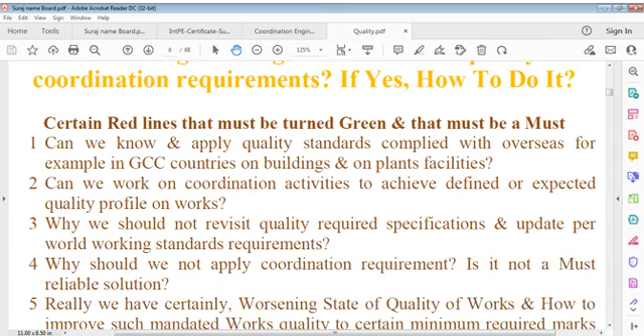We have to wait and cross these stops. And it's not difficult. First, we have to check our own red lines of mind, our own red lines of not doing something at will, or leaving it to others, or not thinking of something, and that drags us to somewhere not acceptable. These red lines must go, and this cannot go just by speaking, it has to go by doing something.

That is where we have to be very work oriented as a person. Work doesn't mean only work, and we have to think in some way of what we say is coordination engineering. I name it that way just for this talk. You can say this talk itself is a talk of coordination engineering, communication engineering, thinking engineering, and research. Research based on what I did. I try to analyze my experience in the past, and I try to compare it with what's happening today and what we think it can take shape of in future, and that's a very important point.

Because we all deal with projects every time in life, and many deal with operations which are continuous systems, but projects are not continuous always. Projects can change. Projects start and end. And that is enough period, we can say, for a person to learn, because there is a start and there is an end, and we can learn a lot from that.

We may say that it's a quality note, something we have to understand clearly. It's not just a note. It gives us general information and specific information that we cannot get otherwise. Now I'm talking of engineers and engineering works. We say, for reliable quality engineering works and deliveries...

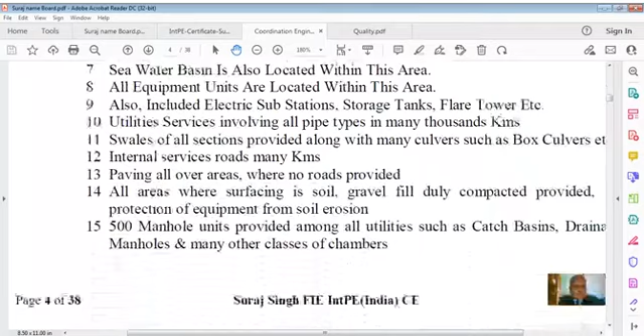This is here a seawater reservoir, you can say, reservoir seawater basin for purpose of storing water at industrial plant, circulating this water for cooling purpose. And then it is also, you can say, this is a record building in Qatar for purpose of digital recording of a plant.

And here is a hospital building in Jeddah, Saudi Arabia. And this is a plant at Ras Laffan, Qatar. And that's as you can see.

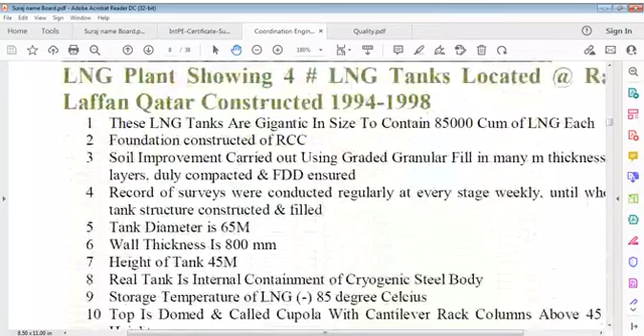I think that covers all this. Now we are on the page where we start coordination engineering, which is a must, you can say, on every project, without which we cannot even think of doing a project. As I already said, coordination is a very different word, and we cannot just commonize this. We have to understand this word in its concept itself, not simply what we think it should be. So here is a point, coordination engineering. Just a minute please, let me put this off here.

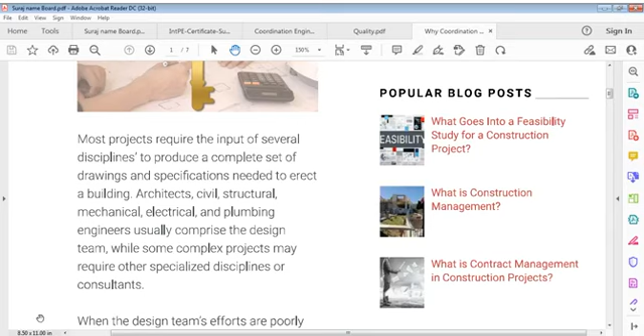Most projects require input of several disciplines to produce a complete set of drawings and specifications needed to erect a building. Architects, civil, structural, mechanical, electrical, and plumbing engineers usually comprise the design team, while some complex projects may require other specialized disciplines or consultants.

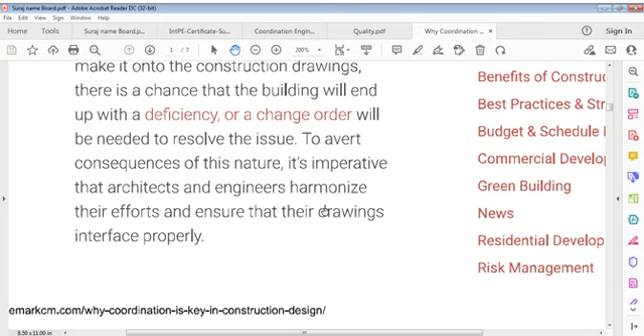When design teams' efforts are poorly coordinated, drawings of one discipline may not align with that of another. If such errors make it onto construction drawings, there is a chance the building ends up with a deficiency or a change order necessary to resolve the issue. To avoid consequences of this nature, it is imperative that architects and engineers harmonize efforts and ensure that drawings interface properly. Also, applicable codes are important in this case.

The design process starts after consultation with the client, during which the project's budget, expected finish date, visual appearance, spatial requirements, functional program, and other design objectives are established. Having established the client's expectations, the architect gets to work on drawings and specifications. At a minimum, a full set of architectural drawings should comprise floor plans, roof plans, elevations, sections, and perspective drawings.

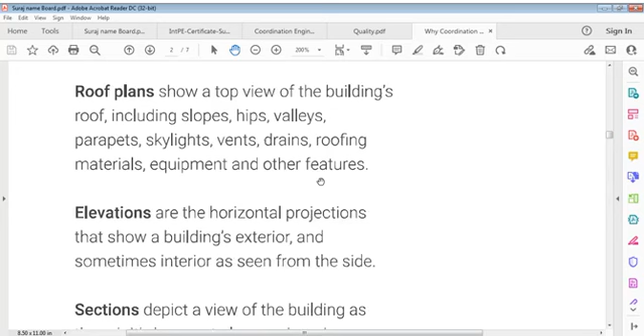Floor plans are vertical orthographic projections which show a building's layout and other physical attributes for each floor. These drawings depict interior walls, doors, windows, appliances, equipment, or use of all spaces. Roof plans show the top view of a building's roof, including slopes, hips, valleys, parapets, skylights, vents, drains, roofing material, equipment, and other features. Elevations are horizontal projections that show a building's exterior and sometimes interior as seen from the side.

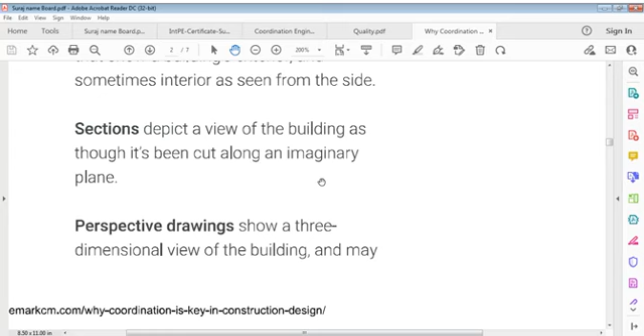Sections depict a view of the building as though it's been cut along an imaginary plane. A perspective view shows a three-dimensional view of the building, and other disciplines work basing their work on preliminary architectural drawings.

Structural engineers design structures to support buildings' live and environmental loads, thus enabling them to remain upright. Generally, a building's structure consists of vertical and horizontal elements such as columns and slabs and connections between them. Among them, the structural engineer's job is to tailor these features to fit in with the architectural designs.

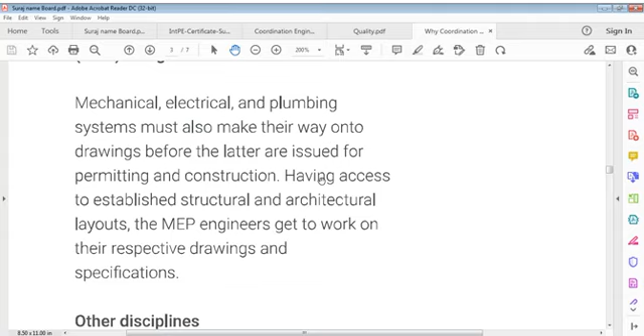Mechanical, electrical, and plumbing, MEP designs, must also make their way onto drawings before the latter are issued for permitting and construction. Having access to the established structural and architectural layouts, MEP engineers get to work on the respective drawings and specifications.

Other disciplines contributing to the overall drawing package may include landscape, civil engineers, communications engineers, acoustics and seismic consultants, and others whose involvement may be required. A clash arises when drawings don't align well with one another. Common examples of clashing include columns obstructing views or passes, misaligned slab edges, mechanical ducts running through structural members, and other instances where a disagreement between disciplines creates an unbuildable scenario.

How to improve coordination? That's the point here. Ensure effective integration between disciplines. The right expectations must be laid out before the project begins. Architects and engineers must agree on a set of deliverables that facilitate their team's coordination efforts. This may vary from project to project.

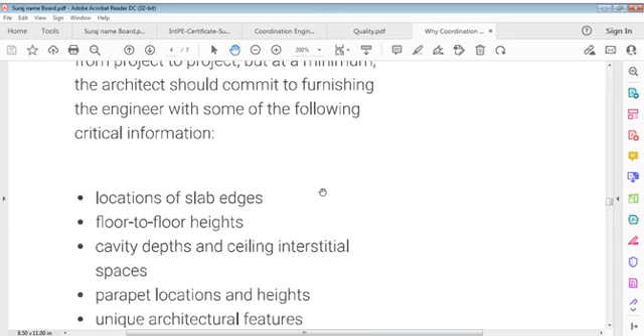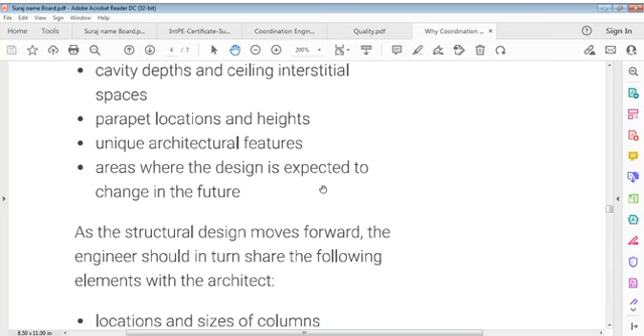At a minimum, architects should commit to furnishing engineers with the following critical information: location of slab edges, floor-to-floor heights, cavity depths and ceiling interstitial spaces, parapet locations and heights, unique architectural features, and areas where design is expected to change in the future. As structural design moves forward, engineers should in turn share the following elements with the architect: location and sizes of columns, and opportunities for improving efficiency of the structure through changes to architectural design.

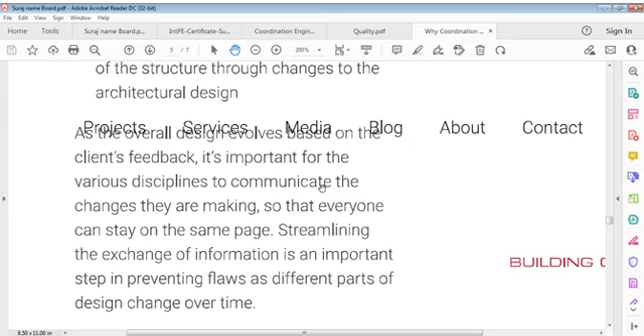As the overall design evolves based on client feedback, it's important for various disciplines to communicate the changes they are making so that everyone can stay on the same page. Streamlining the exchange of information is an important step in preventing flaws as different parts of the design change over time.

Today, modern technology offers a great way to improve efficiency of interdisciplinary coordination. Processes such as building information modeling, usually called BIM, integrate various design inputs, facilitating improved accuracy of clash detection. Peer reviews are also helpful in identifying systemization flaws and getting them fixed. With the aid of BIM and construction organization practices such as peer reviews, project teams should be well equipped to enhance coordination between design disciplines, as well as for complex projects. It always pays to hire a professional construction leader to oversee a project's planning phase.

So this is just, we may say, what is construction management? Professional construction project management is a super fine-tuned system designed to facilitate planning, coordination, and control of a project from early stages all the way through to close out and completion.

All right, that's okay, fine. So we have to close this now and go to something else, and we have to see how it works. Let's go to someone else — I think we got something only from this, not that much. Let's see what research.net says. This is also the latest one, I think. I visited this page already, so I don't know why coordination is concerned.

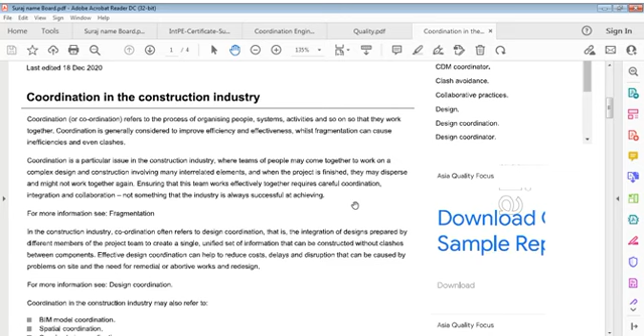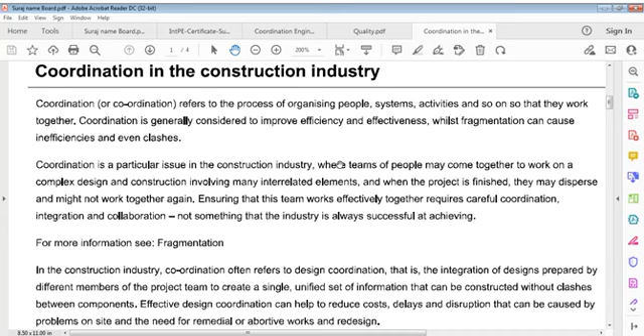Coordination in construction industry. It says coordination in construction industries. We have to be serious about this issue, only then we can understand. So coordination, or coordination, refers to the process of organizing people, systems, activities, and so on and so forth, so they work together. Coordination is generally considered to improve efficiency and effectiveness, whilst fragmentation can cause inefficiencies and even clashes.

Coordination is a particular issue in construction industry, where teams of people may come together to work on a complex design and construction involving many interrelated elements. When the project is finished, they may disappear or disperse and might not work together again. Ensuring that this team works effectively together requires careful coordination, integration and collaboration. So what it says is it requires coordination, integration and collaboration. Not something that industry is always successful at achieving.

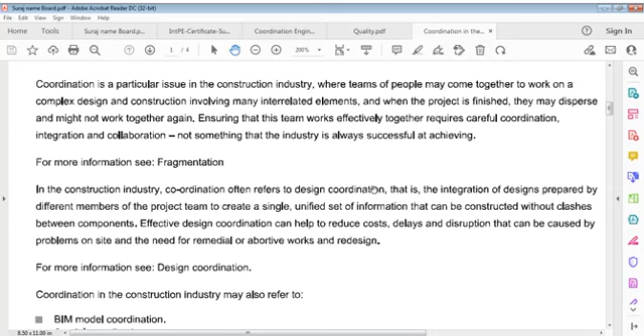This means there exists a void, a big void. Let us see, in construction industry coordination often refers to design coordination, that is, integration of designs prepared by different members of the project team to create a single unified set of information that can be constructed without clashes between components. Effective design coordination can help to reduce costs.

That's what I always stress on, designs. Again I read: in construction industry, coordination often refers to design coordination, which is integration of designs prepared by different members of the project team to create a single unified set of information that can be constructed without clashes between components. Effective design coordination can help to reduce costs, delays, and disruption that can be caused by problems on site and the requirement for remedial or abortive works and redesign.

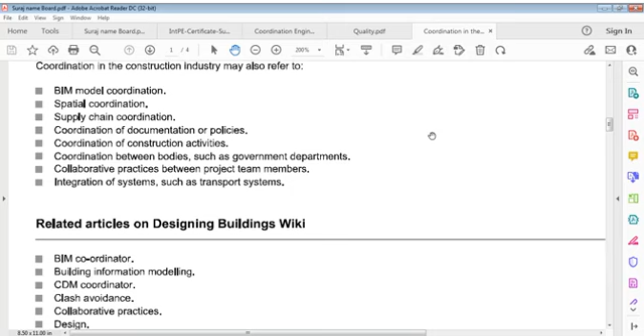Now, coordination in construction industry may also refer to BIM model coordination, spatial coordination, supply chain coordination, coordination of documentation or policies, coordination of construction activities, coordination between bodies such as government departments, collaborative practices between project team members, integration of systems such as transport. There may be many articles on this: BIM coordinator, information modeling, CDM coordinator, clash avoidance, collaborative practices, design coordination, design coordinator, design management, fragmentation, information manager, integrated design, lead designer, retrofit coordinator, tolerances, and likewise, if we go further, there's nothing on page 2.

Why? There's nothing on page 2. What's that? I'm not going to move further on this. What's the reason? Something wrong, I think, here. Let me see what's wrong. Well, I think there's no information. This was end of that.

No problem, this was end of that. So there are projects shown on this, no problem, this is enough information we got from this. I'd like to close this page and find something else if I got anything. So if you go back to that website, it says here, let's see, I'm trying to find more information, that is BIM model coordinator, articles on coordination, BIM model, and it says BIM model is trying to say what's that.

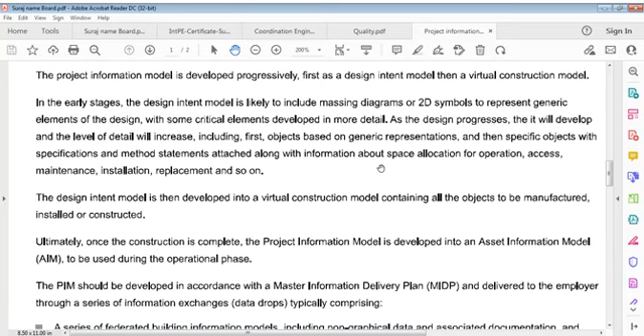As design progresses, it will develop and the level of detail will increase, including first objects based on generic representations and then specific objects with specifications and method statements attached, along with information about space allocation for operation, access, maintenance, installation, replacement, and so on. The design intent model is then developed into a virtual construction model containing all objects to be manufactured, installed, or constructed. Ultimately, once construction is complete, the project information model is developed into an asset information model, AIM, to be used during operational phases.

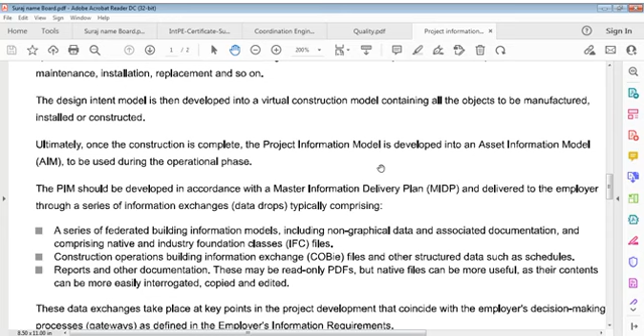The project information model should be developed in accordance with the Master Information Delivery Plan, MIDP, and delivered to the employer through a series of information exchanges, or data drops, typically comprising a series of federated building information models, including non-graphical data and associated documentation, comprising native and Industry Foundation Classes (IFC) files, Construction Operations Building Information Exchange (COBie) files, and other structured data such as schedules, reports, and other documentation. These may be read-only PDFs, but native files can be more useful as their contents can be more easily interrogated, copied, and edited. This data exchange happens at key points in project development that coincide with the employer's decision-making processes, as defined in the Employer's Information Requirements.

Related articles, so what may be articles. So I'll close this, this has done its job. I'm moving on from project information, and I'll take another glimpse here. Let's go to the next topic.

You can say here there's spatial coordination, supply chain coordination, and coordination of documentation and policies. Let us understand what spatial coordination is. Spatial coordination is the process of completing the design and construction of a building, that's what they say. Let us print this out too. I'm just trying to give you as much as possible, and it benefits everybody. It's maybe one or two pages, doesn't matter, but at least we know what's included, since it's about Designing Buildings site, so it's better to know something about that.

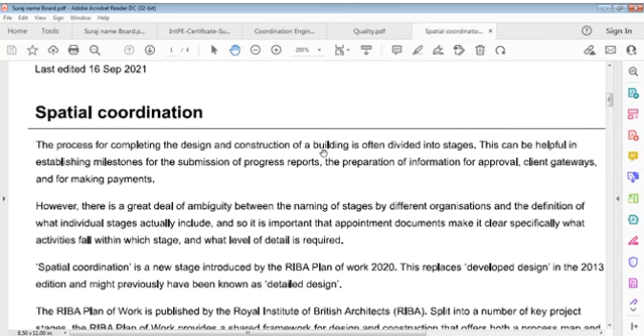What it says is this. Let's see, it says spatial coordination, and this is also a recent one, 2021. Here it says, spatial coordination is the process for completing design and construction of a building.

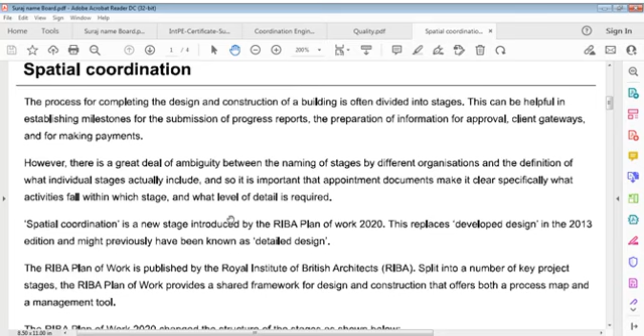The process for completing design and construction of a building is often divided into stages, which can be helpful in establishing milestones for submission of progress reports, preparation of information for approval, client's gateway, and for making payments. However, there is a great deal of ambiguity in the naming of stages by different organizations and in the definitions of what individual stages actually include. It is important that the appointment document make clear specifically what activities fall within which stage and what level of detail is required.

Spatial coordination is a new stage introduced by RIBA Plan of Work 2020. This replaces developed design from the 2013 version. So developed design is gone, and spatial coordination comes into picture.

Detailed design is now called spatial coordination. RIBA Plan of Work is published by the Royal Institute of British Architects and is split into a number of key project stages. It provides a shared framework for design and construction that offers both a process map and a management tool. Let's compare the 2013 edition with 2020.

In 2013 it was strategic definition, and in 2020 it's still strategic definition. In 2013, preparation and brief, meaning brief is now briefing. Concept design remains concept design. Developed design becomes spatial coordination — we have space, and we have to code it accordingly.

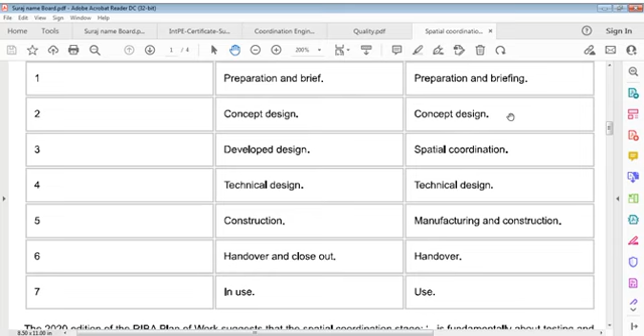Technical design remains technical design. Construction has become manufacturing and construction. Handover and closeout is now just handover, and use is still use. This is what has changed — not a big change, I think.

The 2020 edition Plan of Work suggests that the spatial coordination stage is fundamentally about testing and validating the architectural concept, to make sure that the architectural and engineering information prepared at Stage 2 is spatially coordinated before the detailed information required to manufacture and construct the building is produced at Stage 4. Stage 3 is not about adjusting the architectural concept, which should remain substantially unaltered.

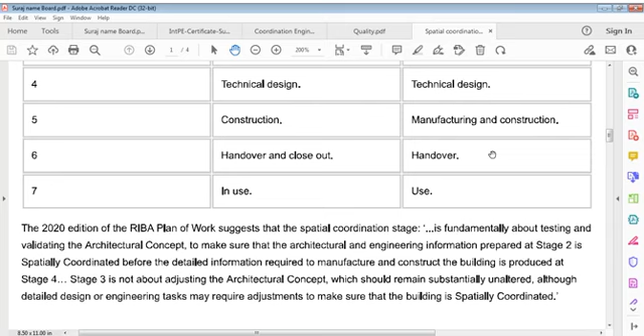Although detailed design or engineering tasks may require adjustments to make sure the building is spatially coordinated, a spatially coordinated design is one in which the client's spatial requirements and the space required for building systems—such as structural and building services engineering aspects including grids, risers, and plant rooms—have been determined and fixed, allowing Stage 4 to progress without further iteration.

I think we have to go to the next one because there are articles here. Let me go back and give as much information as possible about spatial coordination and see what it actually is. Let's check this test, it's different. Unfortunately there's no link here, so we can't say anything more about this from the RIBA Plan of Work page. I'm trying to find where it says the building is spatially coordinated—let's see what that means. It seems to be the same thing, nothing much different, so I don't want to waste more time on this.

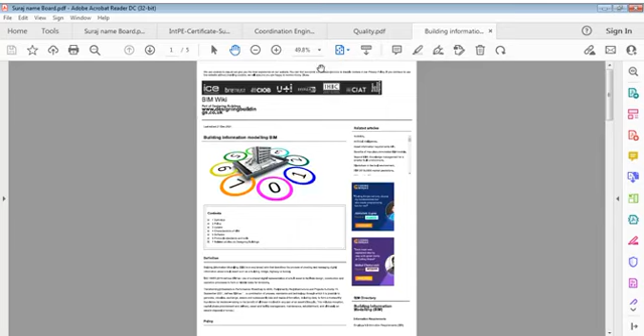Here's building information modeling. You can see headings 0 through 7. Section 7 shows there are 7 stages: 1 is definition, 2 is policy, 3 is uptake, 4 is characteristics of BIM, 5 is software, 6 is protocols, standards, and tools, and 7 is related articles.

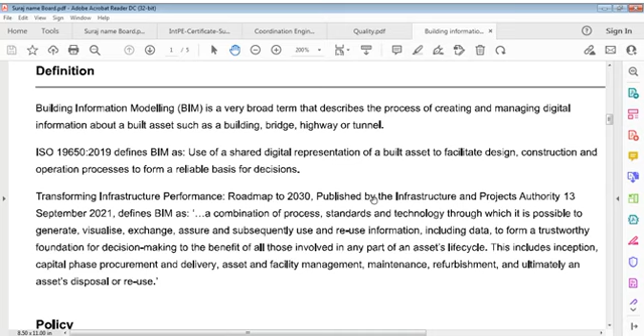This is building information modeling, let's go through it. How does it define it? Building information modeling is a very broad term that describes the process of creating and managing digital information about built assets such as buildings, bridges, and highways—we've gone through this already. ISO 19650:2019 defines BIM as the use of a shared digital representation of a built asset to facilitate design, construction, and operation processes, forming a reliable basis for decisions and transforming infrastructure performance.

The Roadmap to 2030, published by the Infrastructure and Projects Authority on 13 September 2021, defines BIM as a combination of process, standards, and technology through which it's possible to generate, visualize, exchange, assure, and subsequently use and reuse information, including data, to form a trustworthy foundation for decision making for the benefit of all those involved in any part of an asset's lifecycle. This includes inception, capital phase, procurement and delivery, asset and facility management, maintenance, refurbishment, and ultimately the asset's disposal or reuse.

Policy: the UK Government Construction Strategy, published in May 2011, stated the government will require fully collaborative 3D BIM, with all project and asset information, documentation and data being electronic, as a minimum by 2016. This represented a minimum requirement for Level 2 BIM on centrally procured public projects. Level 0 represents unmanaged CAD, computer-aided design.

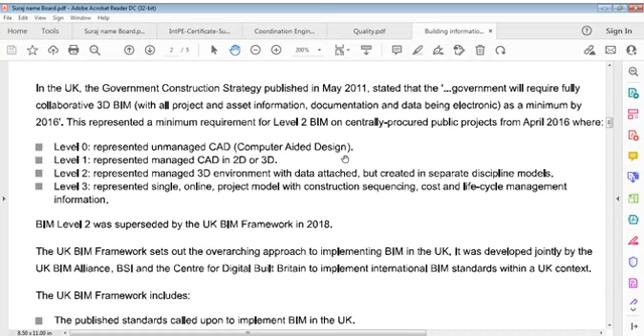Level 1 represents managed CAD in 2D or 3D. Level 2 represents a managed 3D environment with data attached, but created in separate discipline models. Level 3 represents a single online project model with construction sequencing, cost and life cycle management information. So again: level 0 is unmanaged, level 1 is managed 2D and 3D, level 2 is a managed 3D environment with data attached but created in separate discipline models, and level 3 is a single online project model with construction sequencing, cost and life cycle information.

BIM Level 2, representing a managed 3D environment with data attached but created in separate models, was superseded in the UK in 2018.

The UK BIM Framework sets out the overarching approach to implementing BIM in the UK. It was developed jointly by the UK BIM Alliance, BSI, and the Centre for Digital Built Britain. The UK BIM Framework publication is also updated.

NBS has suggested that adopting BIM can cost around 10,000 sterling per workstation. However, this depends on whether implementation is simply an exercise in buying hardware and software and training staff to use it, or whether it's part of a wider process of business change.

The justification for this cost lies in the value that adopting BIM brings to a project throughout its life cycle. The BIM Task Group suggests that, if successfully implemented, BIM can help organizations strip waste from their processes, which in many cases could be significant.

Characteristics of BIM: fundamentally, BIM is about ensuring that appropriate information is created in a suitable format at the right time, so that better decisions can be made throughout the design, construction and operation of built assets.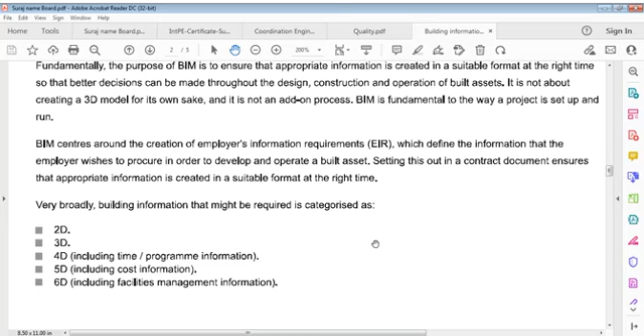Broadly, building information that might be required is categorized as 2D, 3D, 4D — 4D including time and program information — 5D including cost information, and 6D including facilities management information.

For more information, Level 2 building information models are likely to comprise a series of federated models prepared by different design teams, including model files, documents, and structured data files containing non-geometric information about the facility — floors, spaces, systems, and components. Together, this creates a digital replica of the built asset that starts by representing design intent.

But at handover it reflects what has actually been built and installed, and the creation of a geometric model as part of this process allows buildings to be conceived collaboratively and tested virtually before they are built and operated for real. This should reduce problems encountered during construction and occupation.

These models are also created from a series of parametric objects. Each object is defined only once and then placed in the model in multiple locations as required. If the object is then changed, these changes will appear throughout the model, which makes the model automatically consistent and reduces errors.

A common data environment is a single source of information for a project, used to collect, manage, and disseminate documentation, graphic models, and non-graphic data for the whole project team. Creating this single source of information facilitates collaboration between project team members and helps avoid duplication and mistakes.

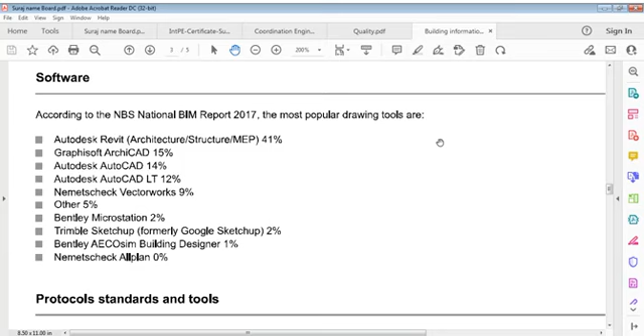According to the National BIM Report, the most popular drawing tool is Autodesk Revit. There are also various protocols, standards and tools.

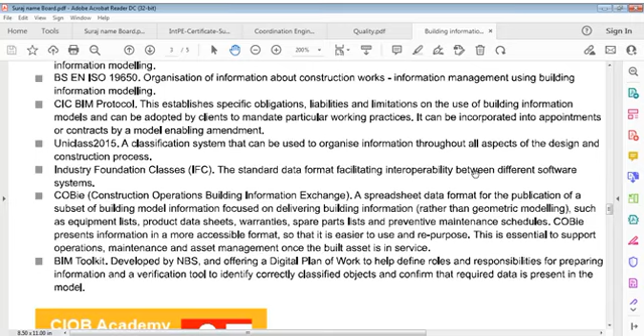I think we've done what we got from this, it's fine, we'll go back to the other one. Not to waste time for nothing. If you get some information, it's fine. I'm just doing this live, and you cannot waste time like that. We have to be very realistic in this. Let's go to some other information which is after.

And here's BIM, now CDM. Let us see what is BIM coordinator. Let's see what is that. What does the BIM coordinator do? Is it useful or not? Let us see, BIM coordinator.

It's long, but I think not much. Let us see what it says, or I'll immediately close it. I'm just trying to see, it's updated, and I'm finding it in many places. BIM, but what it actually is, I wanted to see and share with you live, so you'll have to bear with me, because I did not study this before, but we are just collaborating and studying during the live session.

So BIM, Building Information Model, is a broad term that describes the process of creating and managing the whole library as an integrated data-led process, enabling the team to manage information of the project. Coordination of the building information model is an important responsibility. BIM coordinators can therefore be key members of the project team, helping establish and manage BIM project workflows and assisting in effective resolution of issues that arise.

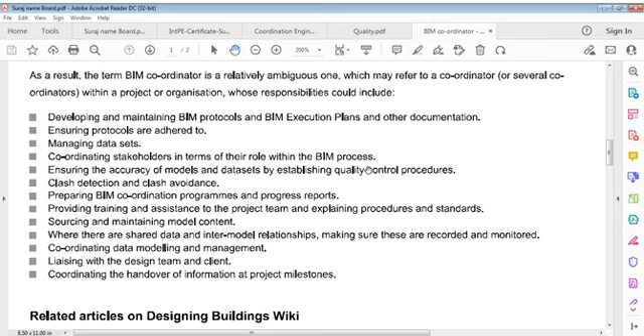Developing and maintaining BIM protocols and BIM execution plans and other documentation, ensuring protocols are adhered to, managing data sets, coordinating stakeholders in terms of their role within the BIM process, ensuring accuracy of models and data sets by establishing quality control procedures, clash detection and clash avoidance, preparing BIM coordination programs and progress reports, providing training and assistance to the project team, and explaining procedures and standards, sourcing and maintaining model contents, where there are shared data and inter-model relationships, making sure these are recorded and monitored, coordinating data modeling and management, liaising with design team and client, coordinating handover of information at project milestones.

Let's repeat it, I think it's something important. We can say developing and maintaining, you can say it's coordinator work, rather than what we said, BIM etc. It's the same thing that a coordinator does.

Developing and maintaining protocols and execution plans and other documentation, ensuring protocols are adhered to, managing data sets, coordinating stakeholders in terms of their role with the BIM process, ensuring accuracy of models and data sets by establishing quality control procedures, clash detection and clash avoidance - clash detection and clash or conflicts, you can say - preparing coordination programs and progress reports, providing training and assistance to the project team, and explaining procedures and standards, sourcing and maintaining model content, where there is shared data, inter-model relationships, making sure these are recorded and monitored, coordinating data modeling and management, liaising with design team and client, coordinating handover of information at project milestones.

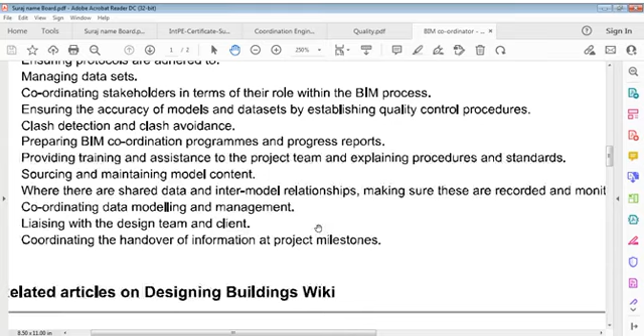Well, I think this is what we could get from here, and it's of course not very bad. Something is always good, so we can say it is sometimes good if we take better control of that. Nothing wrong with anything as such, you can say. So we go back to the other one if we got something, or we close. This was useful, so I'll add it to my own notes.

Then clash avoidance, this is another one. CDM coordinator, what is that? Let us see CDM coordinator. CDM coordinator, it says there are articles. This is CDM coordinator.

This is for 2015. CDM coordinator, principal designer, principal contractor. Principal designer is responsible for the pre-construction phase, while principal contractor is responsible for the construction phase.

Just regarding this, I don't think there's something very important in this CDM coordinator. CDM coordinator was substantially... these regulations saw the role of CDM coordinator transfer to the principal designer. I'll leave it, not very basic, I don't want to discuss. Very basically, I don't want to discuss here. I want to discuss design coordination.

Let us say design coordination. What does it say? It may be better for everybody.

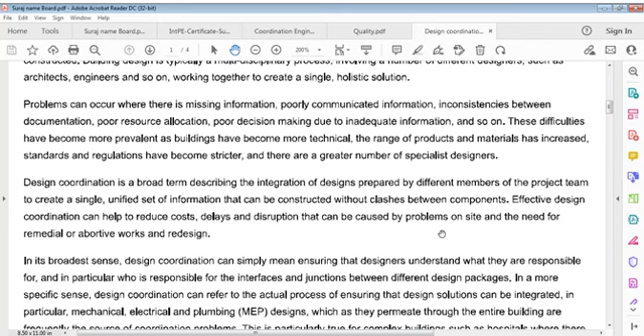Problems can occur where there is missing information, poorly communicated information, inconsistencies between documentation, poor resource allocation, poor decision making due to inadequate information, and so on. These difficulties have become more prevalent as buildings have become more technical, the range of products and materials has increased, standards and regulations have become stricter, and there are a greater number of specialist designers.

Design coordination is a broad term describing integration of designs prepared by different members of a project team to create a single unified set of information that can be constructed without clashes between components.

Effective design coordination can help to reduce costs, delays, and disruption that can be caused by many problems on site, and the need for removal or remedial or corrective works or redesigns.

In its broader sense, design coordination can simply mean ensuring that designers understand what they are responsible for, and in particular who is responsible for interfaces and junctions between different design packages.

In a more specific sense, design coordination can refer to the actual process of ensuring that design solutions can be integrated, in particular mechanical, electrical, and plumbing designs, which, as they permeate through the entire building, are frequently a source of coordination problems. This is particularly true for complex buildings such as hospitals, where there may be a great number of building services that require to be installed in relatively confined spaces.

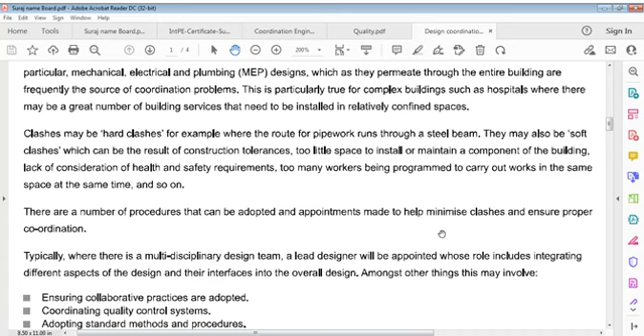Clashes may be hard clashes, for example, where a route for pipe work runs through a steel beam. They may also be soft clashes, which can result from construction tolerances, too little space to install or maintain a component of a building, lack of consideration of health and safety requirements, too many workers being programmed to carry out works in the same space at the same time, and so on.

There are a number of procedures that can be adopted and appointments made to help minimize clashes and ensure proper coordination. Typically, where there is a multidisciplinary design team, a lead engineer or lead designer is appointed whose role includes integrating different aspects of the design and their interfaces into the overall design.

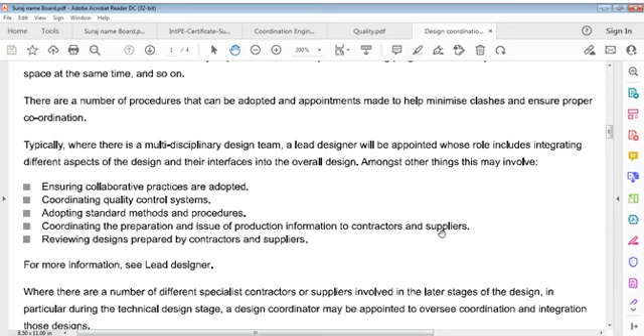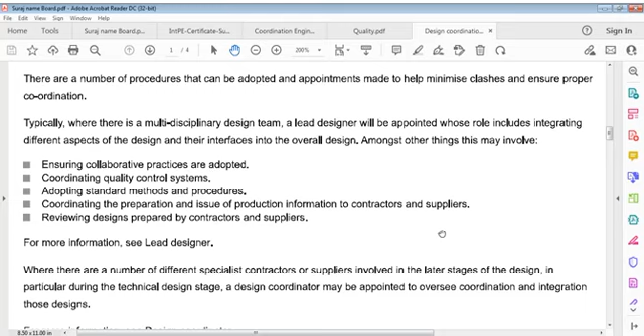Amongst other things, this may involve ensuring collaborative practices are adopted, coordinating the quality control system, adopting standard methods and procedures, coordinating preparation and issue of production information to contractors and suppliers, and reviewing designs prepared by contractors and suppliers.

For more information, we have to see somewhere else. Now, the process of actually verifying design coordination.

Design coordination still sometimes relies on manual techniques for cross-checking information, with transparent design drawings overlaid to identify potential conflicts. Computer-aided design can replicate this process on screens, allowing drawings prepared by different designers to be compared.

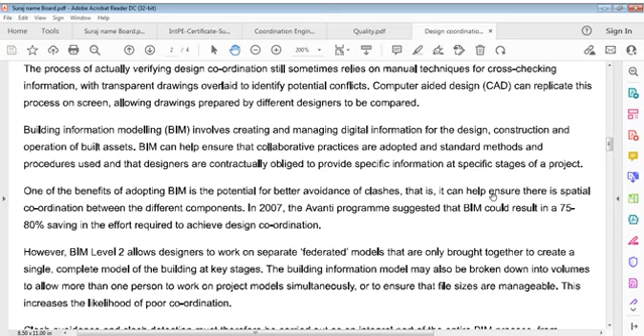Building information modeling involves creating and managing digital information for designs, construction, and operating built assets. BIM can help ensure collaborative practices are adopted and standard methods and procedures used, and that designers are contractually obliged to provide specific information at specific stages of a project.

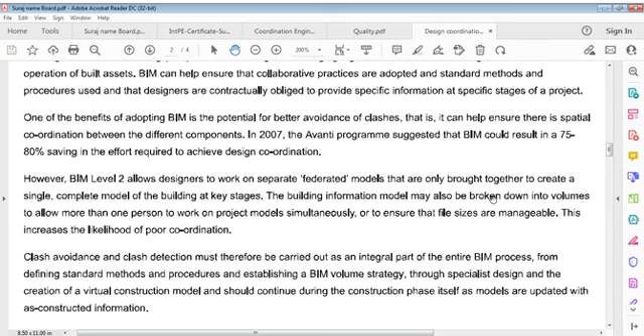One of the benefits of adopting BIM is the potential for better avoidance of clashes, which can help ensure there is spatial coordination between different components. However, BIM Level 2 allows designers to work on separate federated models that are only brought together to create a single complete model of the building.

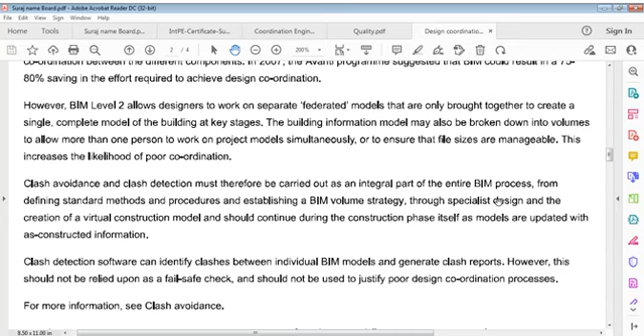This building information model may also be broken down into volumes to allow more than one person to work on project models simultaneously. Clash avoidance and clash detection must therefore be carried out as an integral part of the BIM process, from defining standard methods and procedures and establishing a BIM volume strategy, through specialist design and creation of a virtual construction model, and should continue during the construction phase itself as the model is updated.

Clash detection software.

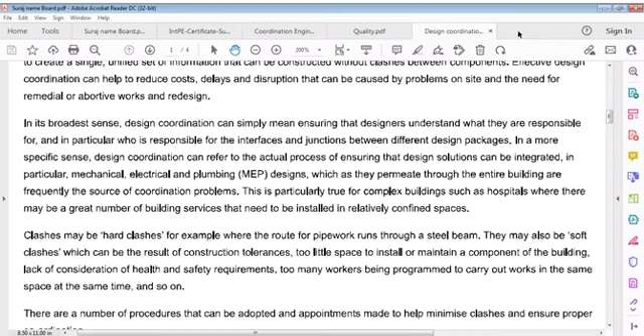From this, it can be used for our work, and I think we can get benefit from that. Something is better, and we can say something is always better, and that's what we are here for. Let us see if we can get some information on this.

I just copy it for incorporation into my file. It's better to do something like that.

So, no issue. I go back to other types that you are doing in designs - design coordination, design coordinator, design management, fragmentation, information - I leave it, I am not interested in that. It's enough food we have got from this, and that's what I say. Sometimes better, sometimes not better. So I can say that here is...

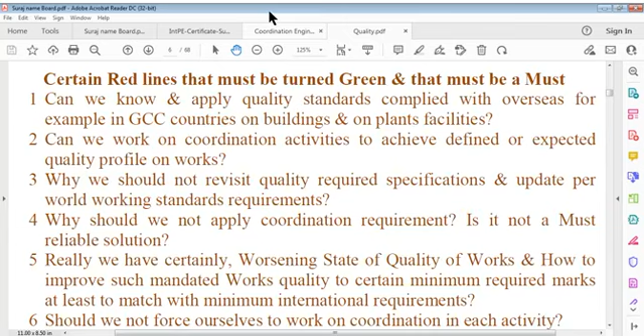Now this I was talking, and now I'm taking back to file. That is important, that is about coordination and coordination engineering. We'll discuss this now because we have got enough food from our discussion, we can say we got enough food. Just give me 5 minutes, please. I'll be back, you meanwhile take some water.

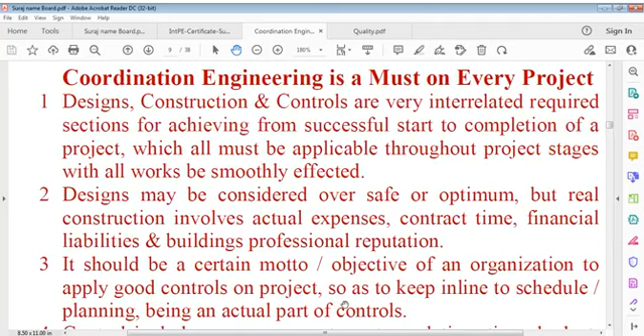As I said, in deliberation, minute deliberation, we studied, and coordination is not clearly understood. This also we said, that coordination is not clearly understood. There is no doubt in that. Without adequate coordination, works cannot be done efficiently. That's also true.

And if we do not do that, in professional engineering, we cannot call it professional engineering, because works cannot be successfully accomplished without coordination. Coordination is not clearly understood. It's very true. And the fact remains that without adequate and efficient coordination, professional engineering works cannot be successfully accomplished. That is also true.

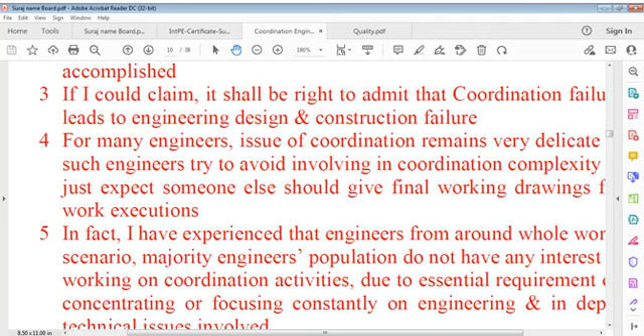For many engineers, we can say, let's just say it's okay. For many engineers, the issue of coordination remains very delicate, and such engineers try to avoid involving in coordination complexity and just expect someone else should give final working drawings for work executions. Even if we have software, BIM as we usually call it, in my software, we may not be able to do that, because software is software. Best software is human being and our personal efforts, we can say that. What I can do myself or you can do yourself, involving personal attention, personal efforts, there is no equal to that.

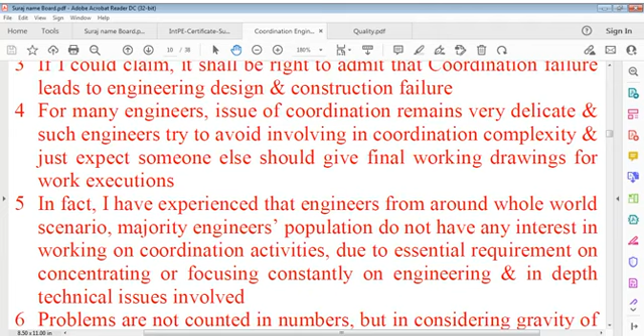In fact, I have experienced engineers from around the whole world. They just want to run away from the scenario of coordination. You can say, I have experienced that engineers from around the whole world, a majority of the engineer population do not have any interest in working on coordination activities due to essential requirements on concentration, on concentrating or focusing constantly on engineering and in-depth technical issues involved. And it's a very, very difficult concentration, and you can say dipping yourself, immersing yourself in that world. Immersion of mind is required. Immersion of presence is required. And problems are not counted in numbers, but in considering gravity of situation, complexity and strong decision making related to whatever work items are involved.

Coordination definition is for sure necessary to be understood for its real meaning so that no mixing results in. Coordination is gross, it is subjective, it is disciplinary, and it is minute, or we can say at detailed levels.

Mixing means a state of confusion which should be avoided. A state of confusion meaning indicates that right activity related to work cannot be carried out at right time, and nothing can be done in that case. If right activity is not carried out at right time, either work is done incorrectly or it is delayed until that information is received and applied or included or provided.

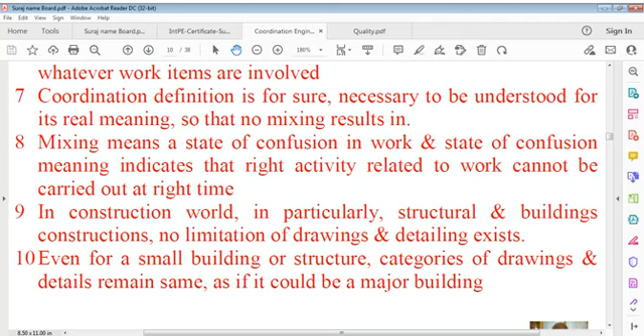Now it depends on designing professionals about how to apply drawings and detailings so that construction personnel should not refer back all times, every time, for either information, confirmation, or clarification of various issues involved. Coordination can therefore be defined in that way.

All branches of engineering involved, and all disciplines involved in ongoing activity must be clearly described and detailed so that no information is left out that could hold back progress on the activity or part of whatever activity.

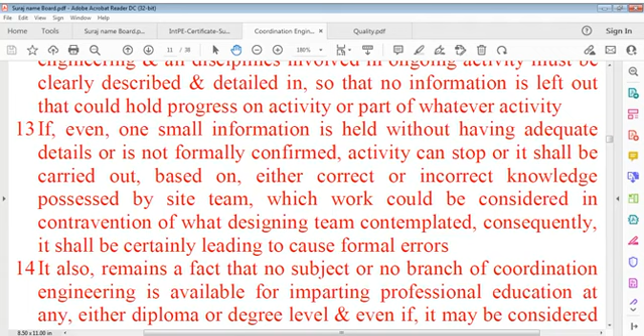If even one small piece of information is held without having adequate details or is not formally confirmed, activity can stop, or it shall be carried out based on either correct or incorrect knowledge possessed by the site team, which work could be considered in contravention of what the designing team contemplated. Consequently, it shall certainly lead to formal errors.

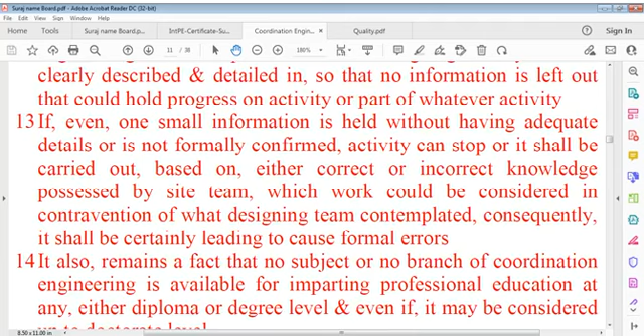It also remains a fact that no subject or branch of coordination engineering is available for imparting professional education at any diploma or degree level, and even if considered up to top doctorate level.

Absence of inclusion of this very significant subject within engineering programs explicitly indicates and evidences that education professionals do not understand the value of engineering coordination discipline. I have gone through searching many sites on the internet about coordination in engineering, and I'm disappointed that I could not find many informative notings or chapters, very few, and that too of theoretical type, not practical type.

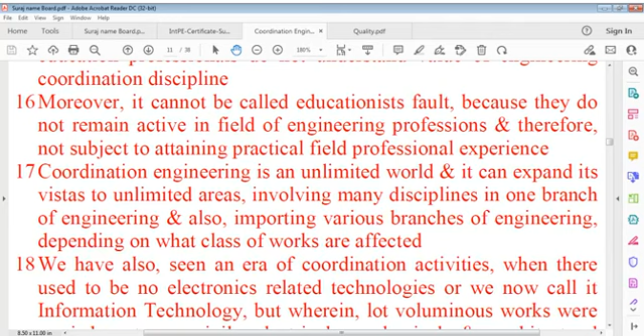Moreover, it cannot be called the educationist's fault. I don't limit it to that, because they do not remain active in the field of engineering profession and therefore are not subject to attaining practical field professional experience. And we should know that practical field professional experience is the solution to good construction and good successful design.

Coordination engineering is an unlimited world and it can expand its vistas to unlimited areas involving many disciplines in one branch of engineering, and also importing various branches of engineering depending on what class of works are affected.

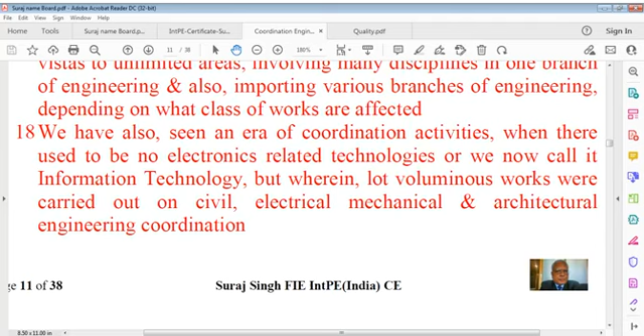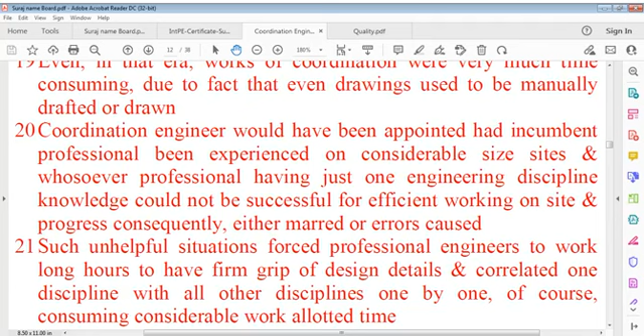We have also seen an era of coordination in the past when there used to be no electronics related technologies, which we call information technology, but wherein large voluminous works were carried out on civil, electrical, mechanical and architectural engineering disciplines. Even in that era, work of coordination was very much time consuming, of course, due to the fact that drawings used to be manually drafted or drawn and all activities were carried out accordingly, calculations were done manually, and all bar charts and whatever we used to write was done manually.

A coordination engineer would have been appointed had the incumbent professional been experienced on considerable size sites, and whosoever professional having just one engineering discipline knowledge could not be successful for efficient working on site and progress, consequently either marred or errors caused. Therefore it is a very heavy position on site because coordination is required, determination is required, devotion is required, hard work is required, intellect is required, and whatever else you can say, no timings.

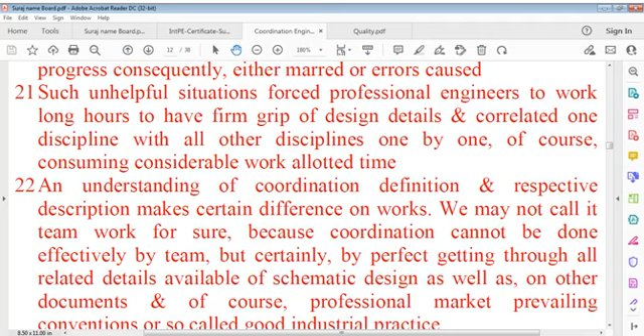Such unhelpful situations force professional engineers to work long hours to have a firm grip of design details and correlate one discipline with other disciplines one by one, of course consuming considerable work allotted time. An understanding of coordination definition and respective description makes certain differences on works.

We may not call it teamwork for sure, because coordination cannot be done effectively by team, but certainly by perfectly getting through all related details available on schematic design as well as on other documents, and of course professional market prevailing conventions, the so-called good industrial practice.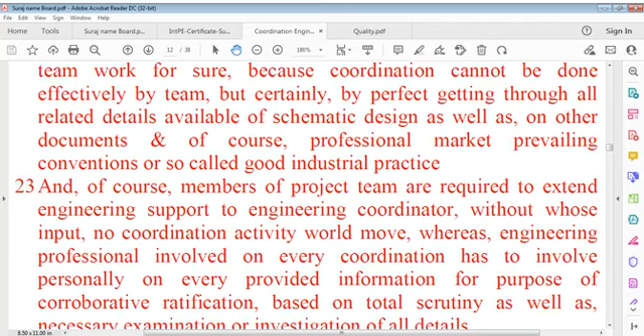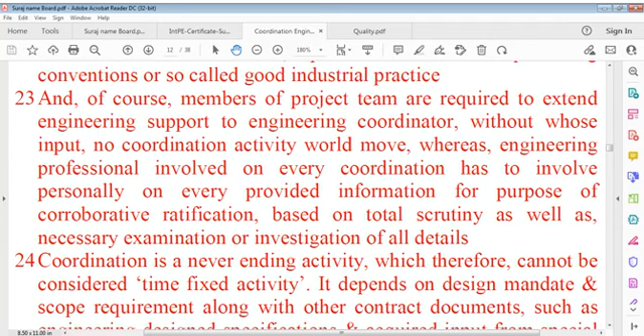Members of the project team are required to extend engineering support to the engineering coordinator, without whose input no coordination activity would move. Whereas the engineering professional involved in every coordination has to involve personally in every piece of information provided, for purpose of corroborative ratification based on total scrutiny as well as necessary examination or investigation of all details.

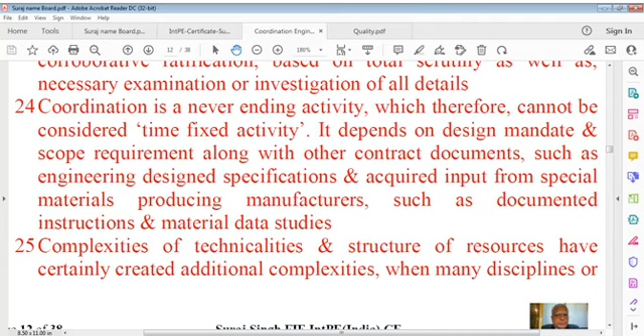Coordination is a never-ending activity which therefore cannot be considered a time-fixed activity. It depends on design mandate and scope requirement along with other contract documents such as engineering design specifications and acquired input from special material producing manufacturers, such as documented instructions and material data studies.

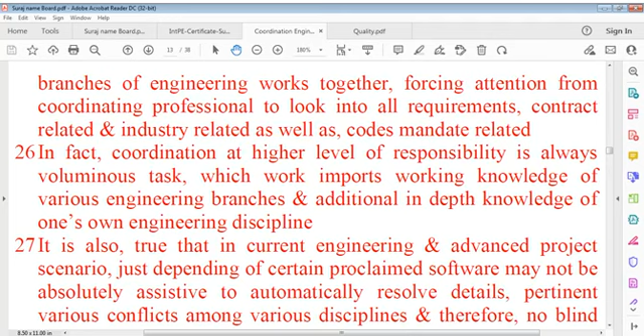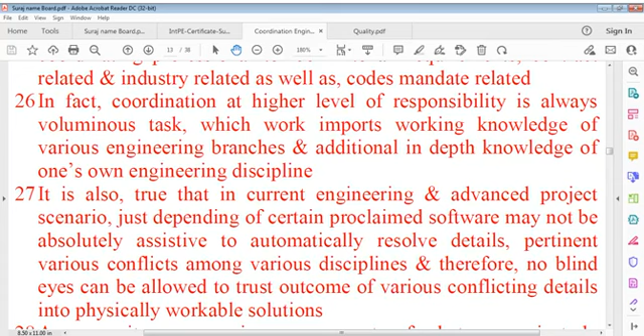Complexities of technicalities and the structure of resources have certainly created additional complexities when many disciplines or branches of engineering work together, forcing attention from the coordinating professional to look into all requirements, contract related and industry related as well as codes mandate related. In fact, coordination at a higher level of responsibility is always a voluminous task which imports working knowledge of various engineering branches and additional in-depth knowledge of one's own engineering discipline.

It's also true that in current engineering and advanced project scenarios, just depending on certain proclaimed software may not be absolutely assistive to automatically resolve details pertinent to various conflicts among various disciplines, and therefore no blind eyes can be allowed to trust the outcome of various conflicting details into physically workable solutions.

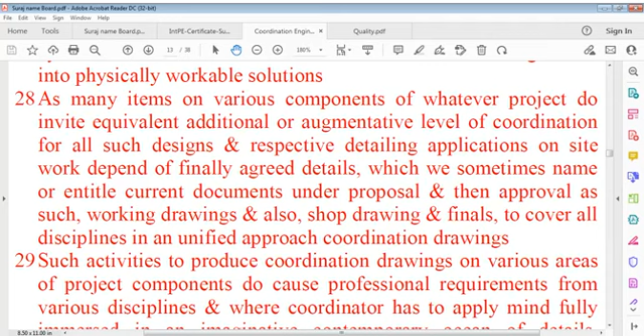Many times, various components of whatever project invite equivalent additional or augmentative levels of coordination for all such designs and respective detailing applications on site work. Site work depends on finally agreed details which we sometimes name or entitle current documents under proposal and then approval, such as working drawings, and also shop drawings, and finally, to cover all disciplines in a unified approach, coordination drawings.

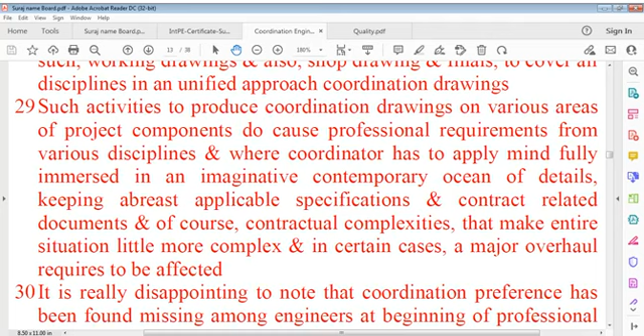Such activities to produce coordination drawings on various areas of project components do require professional input from various disciplines, where the coordinator has to apply mind, fully immersed in an imaginative, contemporary ocean of details, keeping abreast of applicable specifications and contract related documents, and of course contractual complexities that make the entire situation a little more complex.

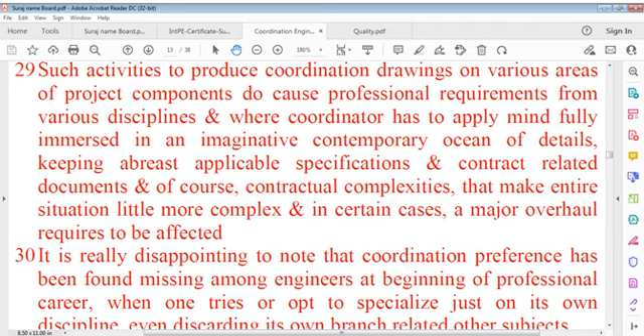And in certain cases, a major overhaul requires to be effected. It is really disappointing to note that coordination preference has been found missing among engineers at the beginning of their professional career, when one tries to or opts to specialize just in its own discipline, even discarding its own branch's relative subjects.

It is of course necessary for professionals to attain some specialization level, but simultaneously they must move on parallel tracks with remaining disciplines and certainly try to join with other engineering branches, overlapping.

Here in this stage of conferring, I'd like to infer with entitled terms such as specialist engineers, organizers, managers, as well as others, because it is a question of coordination, and coordination means...

It's about detailed work. It talks to every detail, it talks to every overlap, it talks to every relative activity, and because of this one has to understand at least the shape of this, or ask for further details, because the coordinator is not really supposed to involve in complete details but connecting details, we can say, just like it has been said, interfaces or inter-information approvals, you may say.

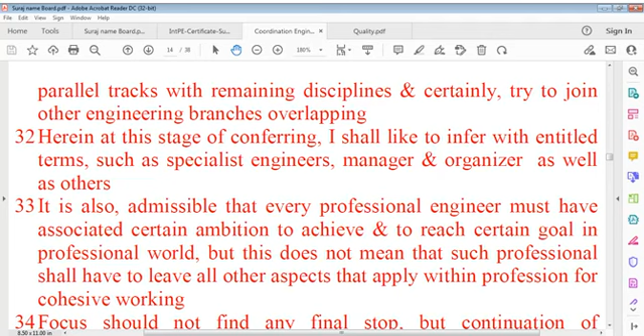It's also admissible that every professional engineer must have associated certain ambition to reach a certain goal in the professional world. But this doesn't mean that such professionals shall have to leave all other aspects that apply within the profession for cohesive working. And cohesive working means integrated working, means working in the same environment.

Adhesive working starts when you come into contact with other professionals, and this means cohesive working, and cohesive plus cohesive plus cohesive working, and then adhesive plus adhesive plus adhesive. Both kinds of working would be available, would be required.

Cohesive working in your own profession or own discipline, whereas other disciplines come into check, you can say, such as electromechanical or someone else out of one profession. In that case, collection of this can be called cohesive working, and then adhesive working, and then mixing working, likewise for overlap purposes.

Focus should not find any final stop, no final stop or period, you can say, but continuation of specialization and then additional working specialization, as major requirements in the engineering profession.

Because engineering cannot be replaced or overtaken by any other non-engineering professional, one should consider the possibility that organization management can be replaced by a professional engineer. It is a positive criteria, whereas the vice versa doesn't apply, howsoever seriously one may try.

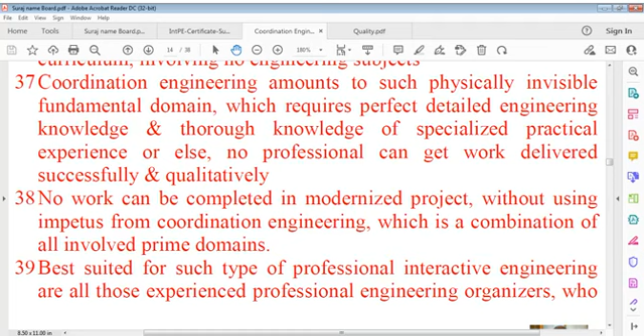So no work can be completed in a modernized project without using the impetus from coordination engineering, which is a combination of all involved prime domains. And this point we have to understand very clearly, what we are talking about.

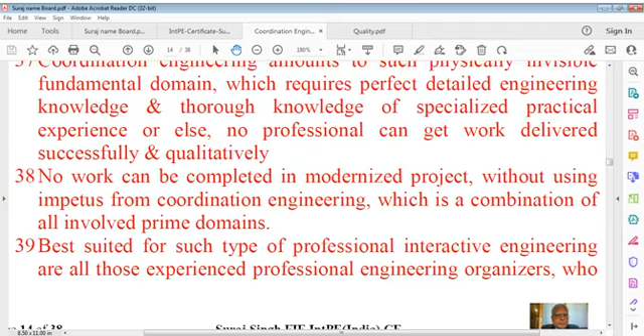Best suited for such type of professional interactive engineering are all those experienced professional engineering organizers who have invested their practice on every such activity, in addition to having attained positive, respective expertise.

In fact, currently coordination is like a super domain for which an ordinary educated engineer cannot best suit in or fit in. But if one has got multi-level experience in office engineering as well as site engineering, one can perform such tasks efficiently, provided involvement is made, concentration is affected, and will is required, because this is a very serious discipline, very serious.

To be very frank, in stating the definition of coordination in a nutshell, it can be acceptable to describe an engineer who can procure all related professionals belonging to respective individual disciplines onto a firm and final agreement on whatever project component or components and whatever activity is applicable, on a set combination of all architectural, structural and services drawings, free from every clash or conflict, or it may be named coordinated drawing for all practical working purposes.

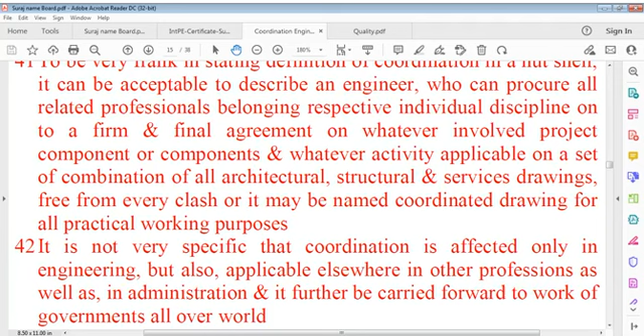Coordinated services drawing, or whatever you want to call it, coordinated services drawings, architectural structural coordination drawing. Likewise, there is no limit, I'm just giving an indication. Now, as I said, whichever activity is applicable on a set of combinations of all architectural, structural, services drawings, free from every clash, it may be named coordination drawing for all practical working purposes. It's not very specific.